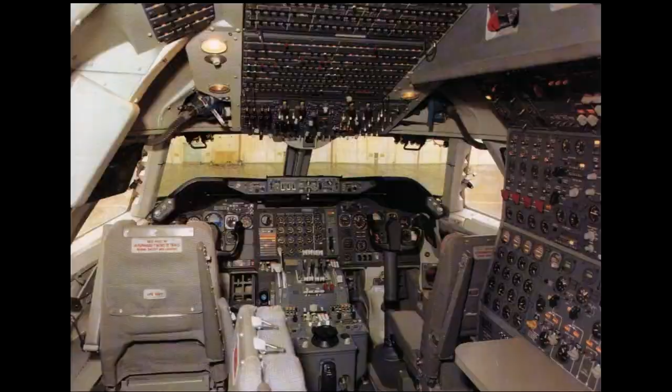In comparison to old technology aircraft, the flight deck on the A320 is designed to be a comfortable, uncluttered environment in which to work. By utilizing modern electronic display units, the presentation of information to the pilots has been improved.

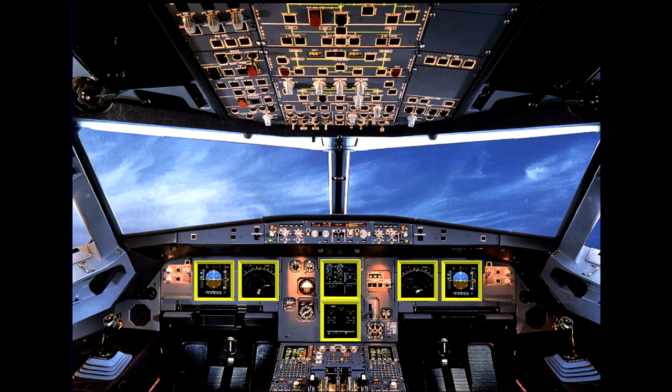The Electronic Instrument System, EIS, consists of 6 identical full-color cathode ray tube display units. The EIS is divided into 2 subsystems: the Electronic Flight Instrument System, EFIS, for which each pilot has 2 displays, and the Electronic Centralized Aircraft Monitoring System, ECAM, which uses the 2 displays in the center to provide information on the aircraft systems. Let's look at the EFIS system first.

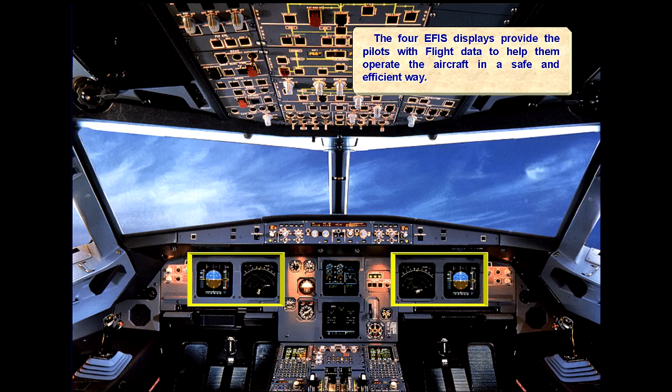The 4 EFIS displays provide the pilots with flight data to help them operate the aircraft in a safe and efficient way. Flight parameters are displayed on primary flight displays, PFDs, while navigation data is displayed on navigation displays, NDs.

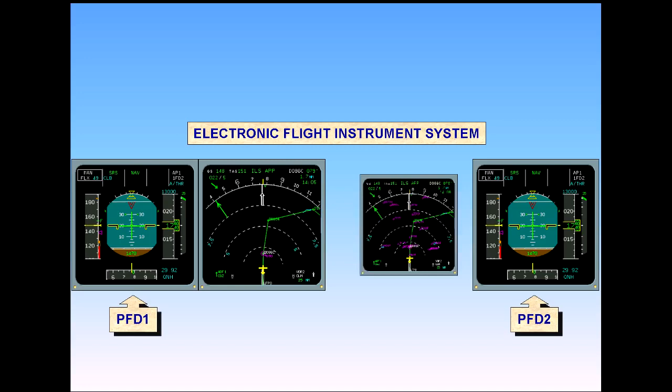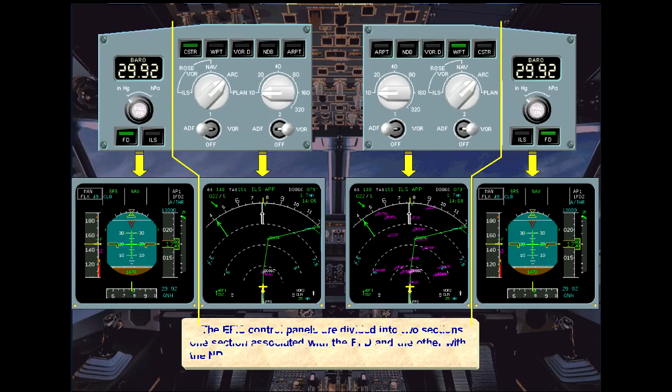Each pilot has an EFIS control panel to select what is displayed on the EFIS screens. The EFIS control panels are divided into 2 sections, one section associated with the PFD and the other with the ND. Outboard of the PFD, there are control knobs to adjust the brightness of the associated PFD and ND, or to turn the display off.

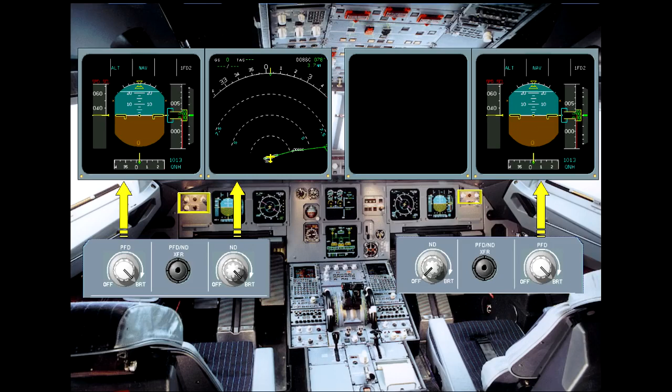A switch is provided to allow the information on the PFD and ND displays to be transferred.

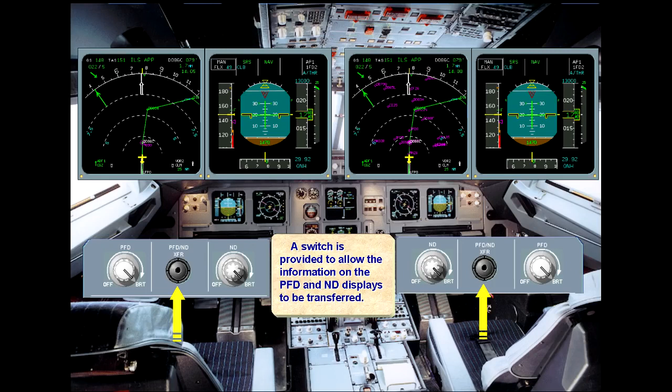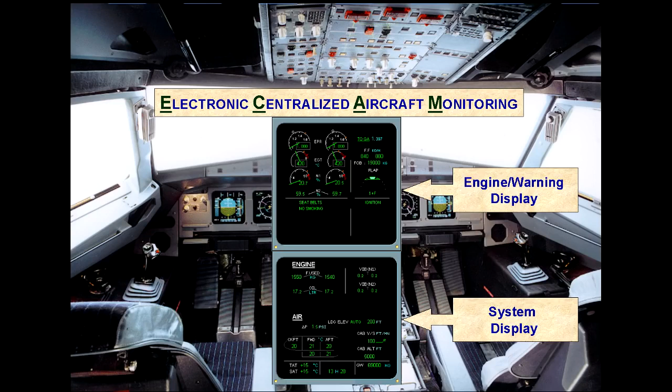The 2 displays in the center are dedicated to the Electronic Centralized Aircraft Monitoring System, ECAM. The upper ECAM display is known as the Engine Warning Display, E/WD. The lower ECAM display is known as the System Display, SD. It is on this screen that various aircraft system parameters can be viewed by the pilots. As an example, we will cycle through the system pages for you.

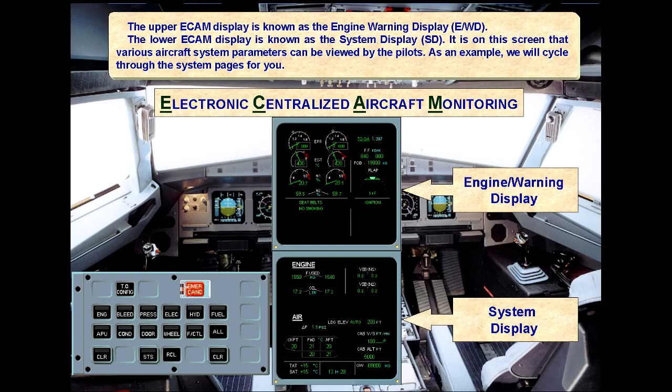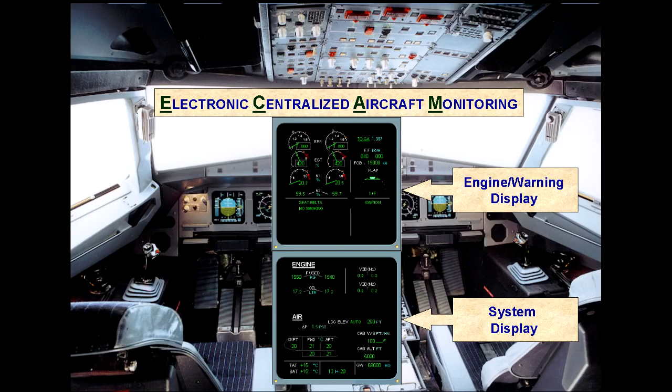The presentation of system information is based on a need-to-know philosophy. This means that only the system information relevant to the particular phase of flight is presented to the pilots. You will see this demonstrated in the normal and abnormal operation modules.

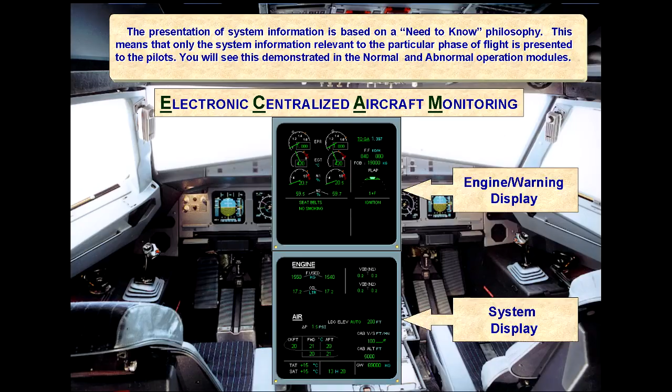Another philosophy that is used on the flight deck is the lights out principle. What this means is that when the aircraft is in its normal flight state, there will be no white lights illuminated in any of the switches on the overhead panel. Let's look at some switches and show the different possibilities.

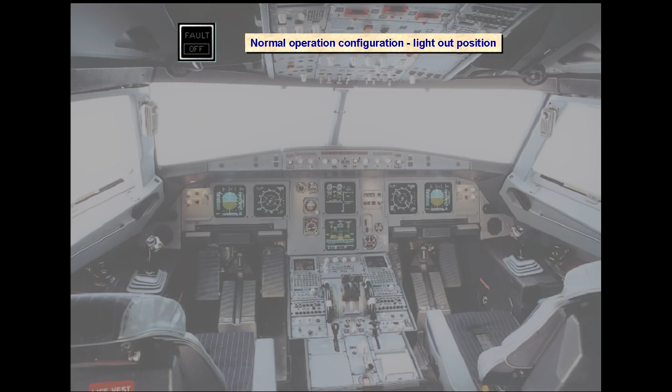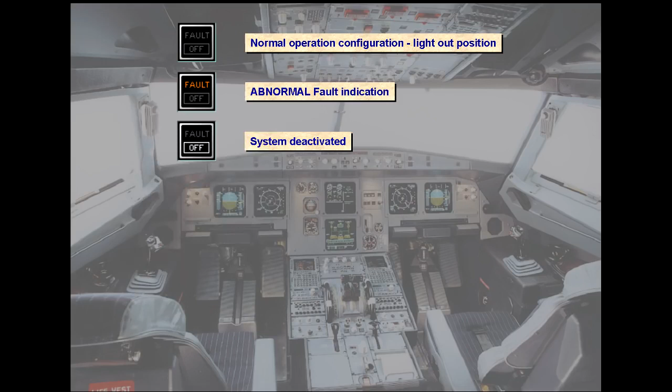For the majority of the switches on the overhead panel, the push-button switch logic is: normal operation configuration, no light showing, the lights out philosophy. Abnormal condition, amber fault light - this assists identification of the switch associated with an abnormal condition. Non-lights out switch position, white light. If normally the system should be operating and is deactivated, a white off light is illuminated. If normally the system should not be operating and is activated, a white on light is illuminated.

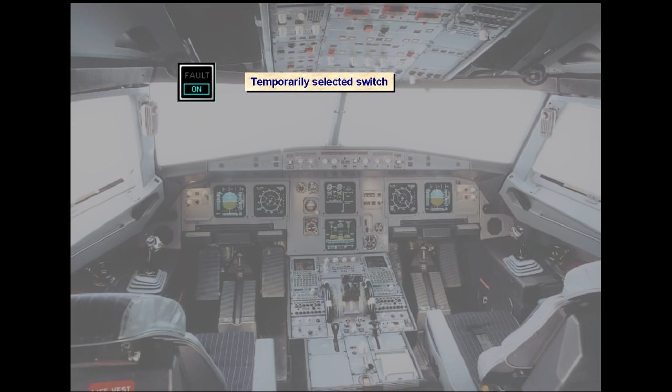There are some switches on the overhead panel which are used on a temporary basis or may have an indication of their state. The logic is: temporary selection for operational reasons, blue on light, such as anti-ice. Applicable system status, green light, such as APU available.

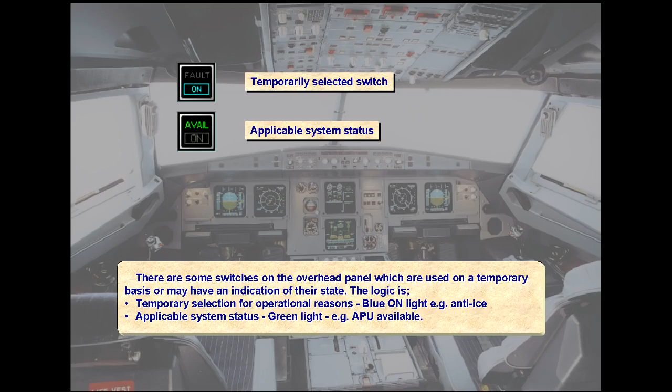Below the ECAM displays on the center pedestal is the ECAM control panel. The two controls on the left-hand side are to adjust the brightness of the two ECAM screens or to turn them off. We will look at the rest of the controls on this panel in more detail later.

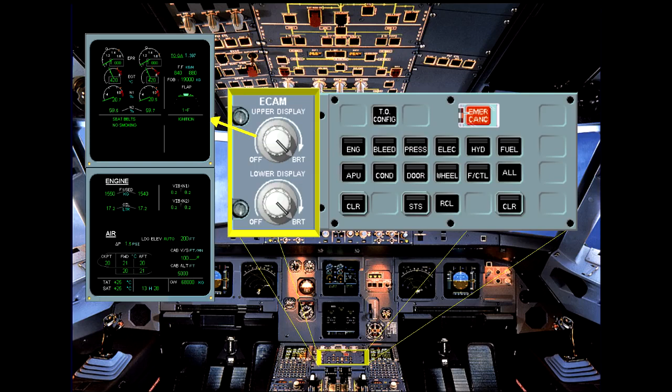Just below the ECAM screens on the pedestal is a switching panel for use in abnormal situations to restore data to the EIS and ECAM displays.

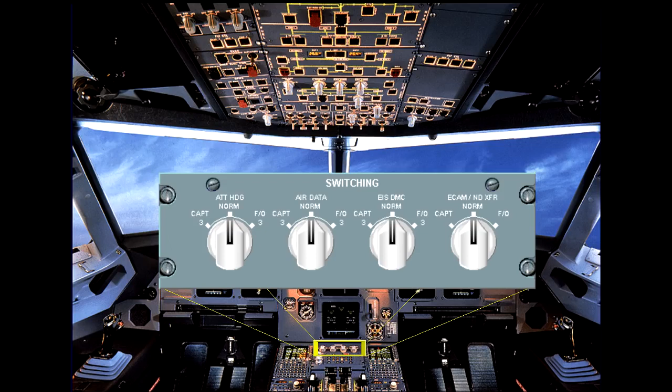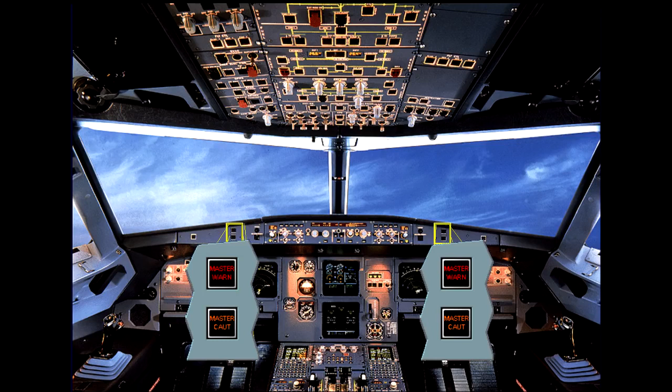In front of each pilot, there are two attention getters: a red master warning and an amber master caution. As a further means of getting the pilot's attention, there is a loudspeaker on each side of the cockpit for oral alerts and voice messages. Note, the loudspeakers can also be used to listen to ATC and the intercom.

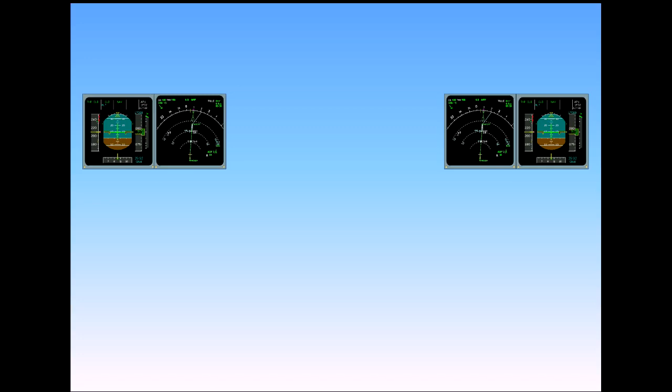Now, let's go back to the EIS system. For the EIS displays, data from the Air Data and Inertial Reference System, ADIRS, plus navigation data from the Flight Management and Guidance System, FMGS, is fed directly to three Display Management Computers, DMCs.

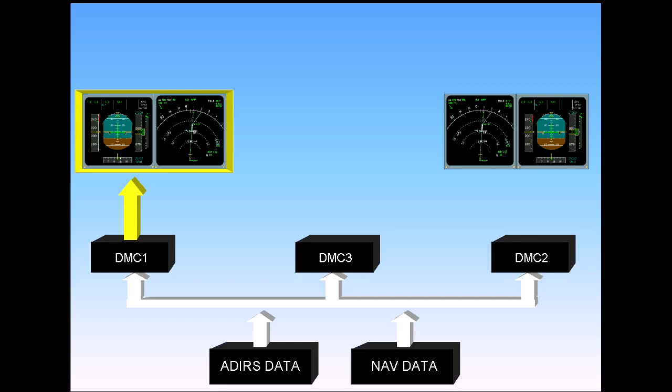The three identical DMCs process the data and generate the images to be displayed. Under normal circumstances, DMC-1 supplies EFIS information to the captain's PFD and ND. DMC-2 supplies the first officer's PFD and ND. DMC-3 is available as a backup.

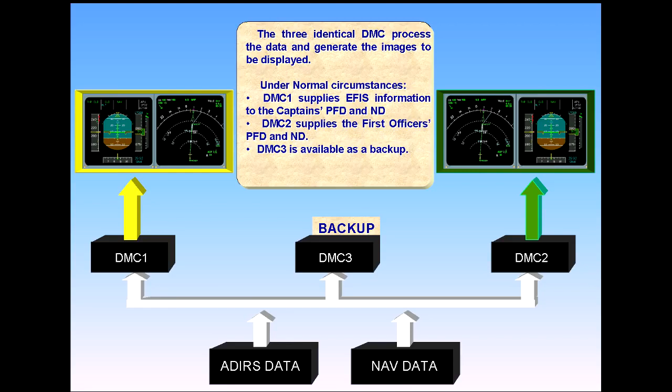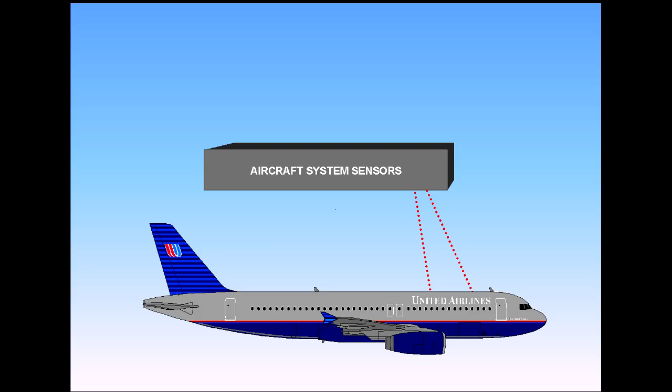Now let's look at the other EIS subsystem, ECAM, and how the ECAM displays get their data. Sensors are fitted throughout the aircraft to monitor the various systems, including system controls operated on the flight deck.

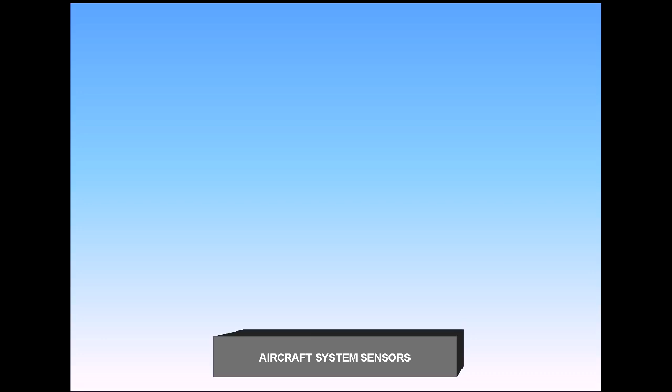Data for certain parameters, for example fuel quantity and primary engine indications, is routed directly from the system sensors to the three DMCs. Note that there are separate channels within each DMC for ECAM and EIS.

For a majority of the systems, the sensors supply data to two Systems Data Acquisition Concentrators, SDACs. The SDACs acquire system data, process it, and send system page data to the three DMCs.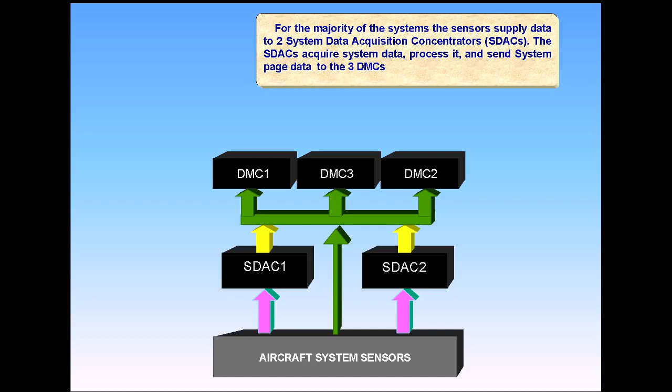Normally, DMC-1 supplies the engine warning display. DMC-2 supplies the SD, the system display.

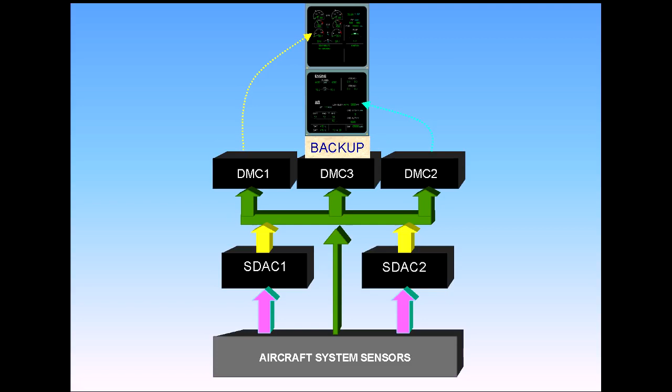Two identical flight warning computers, FWCs, receive data from the aircraft system sensors to generate red warnings, the SDAC to generate amber cautions.

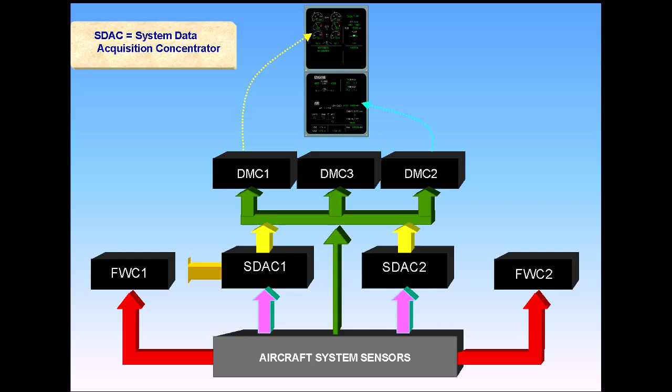The FWCs then supply the DMCs for the display of alert messages, the attention getters, the loudspeakers for aural alerts, and synthetic voice messages.

Speed, speed, speed.

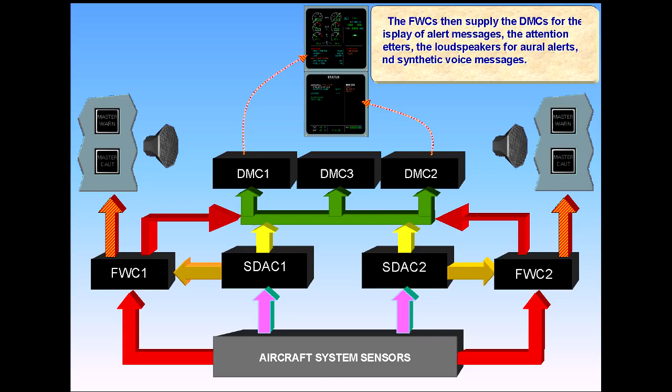All the components shown can be collectively called the ECAM system. We will study the use of the ECAM system in a separate module.

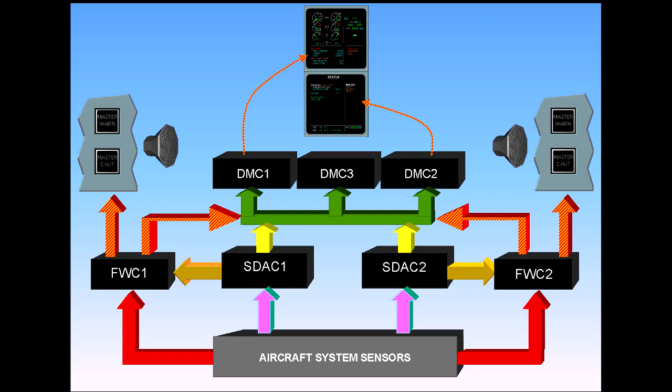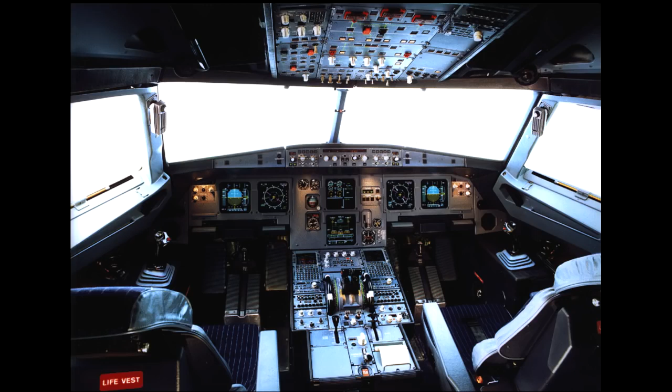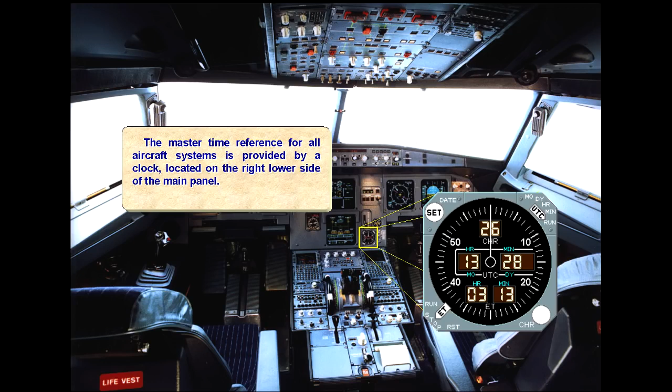The master time reference for all aircraft systems is provided by a clock located on the right lower side of the main panel. The time is also displayed at the bottom of the system display.

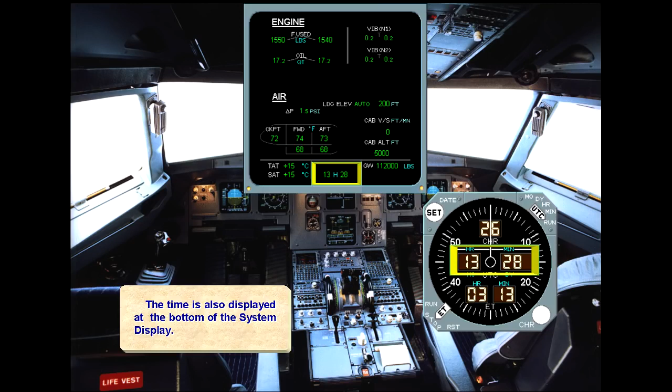The two chrono push buttons, located on the glare shield, control the associated display on the individual NDs. The chronos operate as stopwatches, measuring either seconds, minutes, or hours.